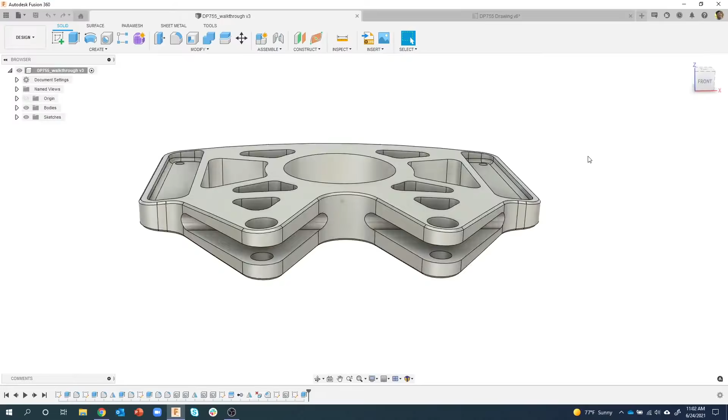I posted this out onto the Facebook forums, and people have already responded how they would go about modeling it. My method is not the correct method. It's not the only way of doing it, just one way of modeling this. So it'd be really interesting to see how everybody else approaches something like this.

We're also thinking about having Angelo take this model and show how you would machine it—how you'd do these pockets, the curved surfaces, the chamfered edges, and all that kind of stuff. So keep an eye out for an upcoming live stream on that.

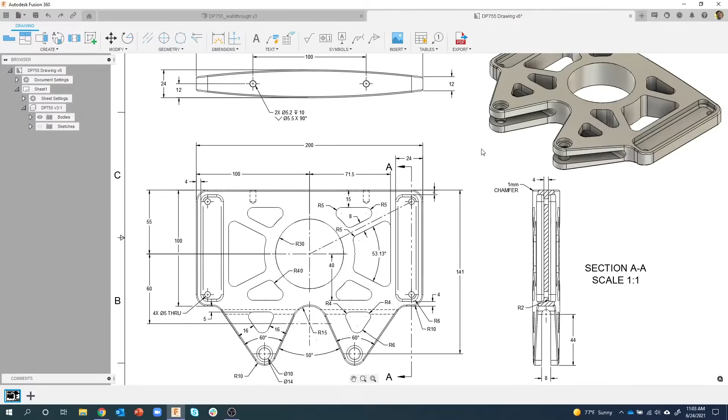This is the drawing that I created that I'm going to go off of, so I'll be referencing this drawing quite a bit. I've also included the outline and the drawing in the description of this YouTube video, so please feel free to download those and follow along, or try it yourself once this video is over.

So I'm going to go ahead and dive right in. Again, this is kind of how I approached it—I'm not saying this is the exact correct way. First thing I'm going to do is change my units into millimeters since we're doing metric for this. Because the part is pretty symmetric, I'm only going to draw part of the part—basically a quarter of it, and half of the part. You'll see that as we go along.

I'm going to create my sketch on my top plane because most of the information to me is kind of being displayed in this top representation.

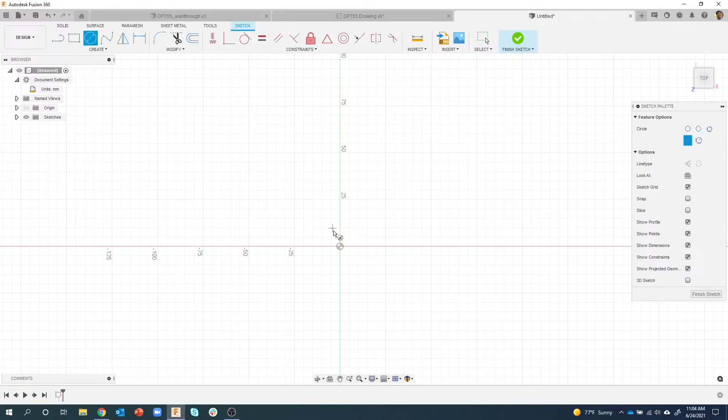The very first thing in the drawing asks for a 30 millimeter radius dimension, and you'll notice by default we do diameter dimensions. So how do I get a radius dimension? All I have to do is click to create the circle—I didn't type in anything. Then I'm going to do a dimension, using the D key as my shortcut. I'll select this, and you'll notice it's showing me a diameter. But if I right mouse click, I can change it from a diameter to a radius. Now it's asking for a radius number—we'll type in 30 and hit OK. I now have a 30 millimeter radius circle.

The next thing I want to do is create a centered rectangle, but it's actually not centered to the origin. It's kind of hard to see, but this rectangle is 100 millimeters tall, and it's offset by 55 millimeters, so it's sitting a little bit higher—there's more room up here than down here. So how do I go about doing that?

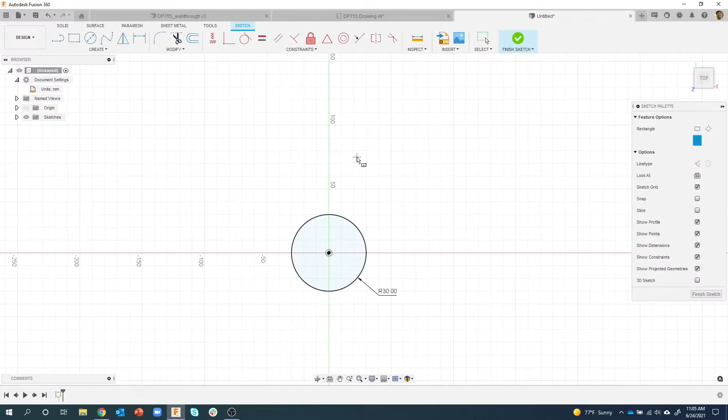I'll go into my rectangle, center rectangle, and just kind of draw it out here in space somewhere, not getting near the origin. I can type in 200 millimeters wide by 100 millimeters tall. Then I can move this around—you'll notice it's not fully constrained. What I want to do now is line it up with this origin right here.

I'm going to do a horizontal vertical constraint, a tip I showed last time. You'll notice it's not catching to the midpoint here—it's looking for a point, and there is no point along here. But I want to catch to the midpoint, so I'll hold down my Shift key, and now it's catching to that midpoint of this line. I'll click there, and it's now made the midpoint of this line vertical with my origin.

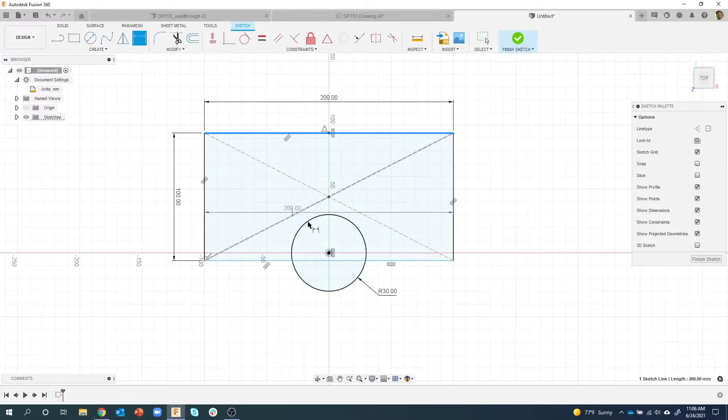Okay, now I can throw that dimension on here. So I'll say from there to there, we'll make that the 55. And sure enough, you can see it put it in the correct location. The lines turn from blue to black. That means they're fully constrained, and we're going to be focusing on that quite a bit to make sure that we have a fully constrained sketch as we're going through.

Okay, what I'm going to start doing now is start to build these arms. And these are kind of interesting. You'll notice they're like 60 degrees like this, but this one is more sloped than this one over here. This is 50 degrees here, with a radius of 15.

So I'm going to start building these arms right here. Let's start out with that 15 millimeter radius. So again, I'm just going to start to draw off to the side, and it's asking for a radius, so I'll click somewhere, create my radius dimension, and type in 15. Then I'll make sure that's lined up using constraints, like so.

Okay, now I'm going to back up half a second here. You might ask, well, couldn't you just hover over this point right here and you'll see this cyan line appear? Now I know I'm perfectly lined up with that center point and I could create my circle. Well, here's the deal—that was just a snap guide, so it is not constrained at all to that point. That's only a guide. That's why I tend to draw things off to the side.

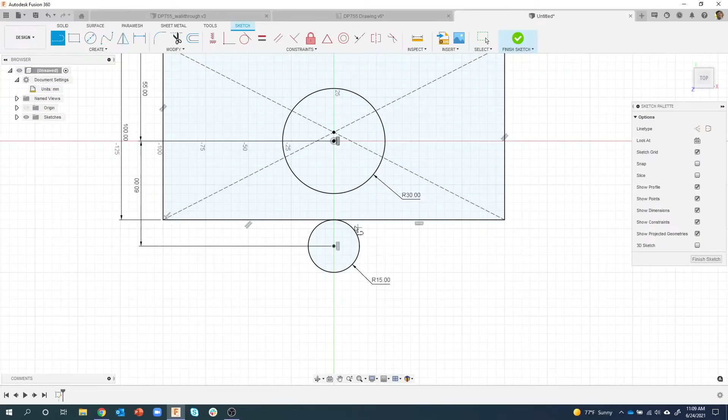So I obviously want to do a tangent line because it's going to come off this circle in this direction. So I'm just going to click and hold, and you'll notice by holding down my left mouse button, it's doing this automatic tangent for me. So I'll click there, maybe something like that, and then do the same thing on this side—click and hold, you can see I got the tangent, and I'll just come over here somewhere. So I quickly mocked up what that's going to look like.

Then we're going to control it with the dimensions from the drawing. Again, I'm not going to flip back and forth too many times on the drawing, but just know that I'm referencing the drawing to get these measurements.

So let's do a dimension. I'm going to go ahead and control these—we know those need to be 60, so I'll type in 60. I'll do the same thing over here. Now I could type in 60, or I can click on an existing dimension and it's going to reference that dimension. The reason this is handy is because if I came back and said make that 65, that's going to turn to be 65 also, and I don't have to type it in twice or make a mistake, typing in 61 instead of 60 or something like that.

Okay, so now we know those triangles are 60 degrees. Then I'm going to control—we know it's 50 degrees between these two guys—so I'll place that one and say 50. But you'll notice this one's leaning a little bit more than this one over here, and this one's a little bit higher than this one over here. But this is kind of the fun part, I think, where you see your sketch start to get built and controlled correctly.

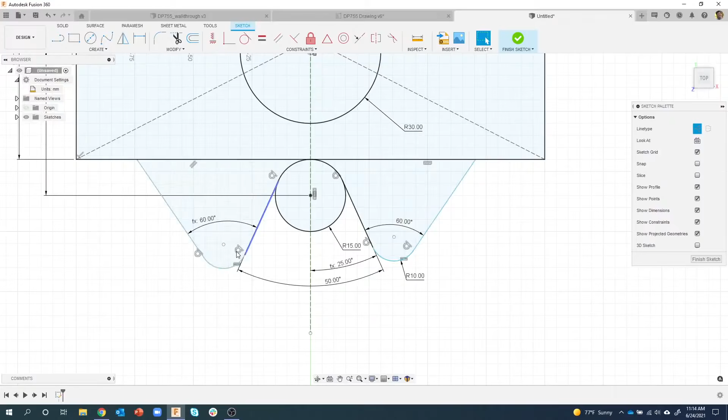Now I want to make these lined up, so let's control one of these. Using the drawing here, I can see that this circle, or this center point, happens to be 141 from the top edge. So I'll throw a dimension from here to that point, and say 141, and we're starting to see all of this is becoming fully constrained.

Now I want this other finger to be perfectly lined up with that, so let's go ahead and do a horizontal constraint. I want that point to be the same as this point right here. So you can see by using the horizontal constraint, it went ahead and did that.

I notice there's a lot of road noise around me. Hopefully that's not coming through on the microphone. Hopefully you guys are able to hear me okay and learn everything.

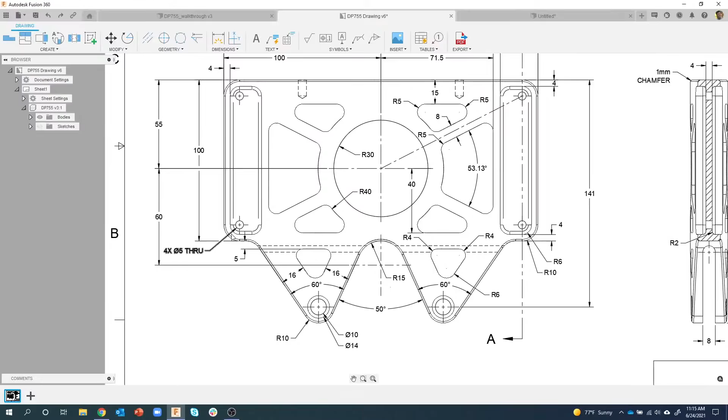Looking at my drawing, there's a lot of stuff going on, and you hear me all the time talk about keeping your sketches simple. I highly recommend doing that because the more complex your sketch gets, the more confusing it gets. So I'm actually going to reuse this sketch a couple times, but then we'll get to a good stopping point, create a new sketch, and then finally create a third sketch, for example.

So I'm going to keep this sketch pretty simple. I'm not going to do any of these pockets or holes or anything like that. All I'm concerned about right now is the main shape. We can see that the overall thickness of this object is 24.

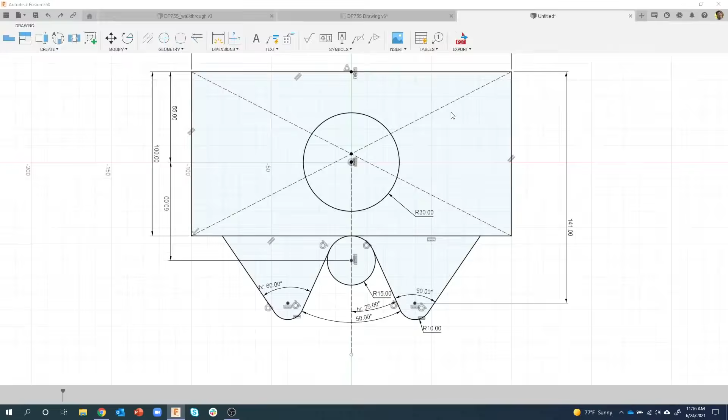We can also see that it's pretty symmetric, so I'm actually going to do half of the model. We're only going to create the top half of this model, and then we'll mirror it near the end to move everything to the bottom side. So I'm going to go half of 24, so 12. We'll finish my sketch, select my profiles that I want, extrude, and go ahead and say 12 instead of the 24.

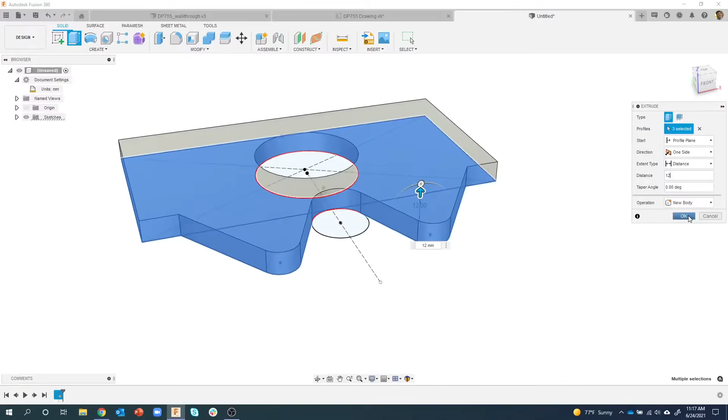Also notice I'm extruding up, so my sketch is kind of on this bottom plane. And there's our basic shape.

Now I'm going to continue on here. Let's fillet these edges. Again, using information from the drawing, I'm just going to fillet these vertical edges. Might rotate so I can see that one a little bit better.

10 millimeters, we're good to go there. And now I want to start working on some of these pockets and stuff like that. Here's my original sketch, I'm going to kind of keep that as my original, almost like my skeleton sketch. And then my next sketch I'm going to do just, for example, the pockets.

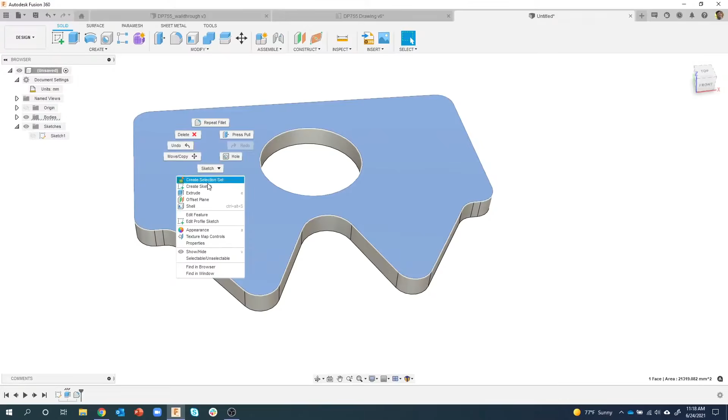So I'm going to click on this top face, create a sketch, and then I want to grab the information, so we're going to project. So create, project, or as you see me always do, I always use the P key, P for project. But I want to project the whole body.

In fact, it wouldn't matter in this case because there's not much going on. I could do the specified entities, but I'm going to do bodies pretty much the whole time. So I'm going to switch to bodies right now, and it's going to project that whole body onto our sketch, including, for example, the center points of these fillets.

And now you kind of know why I did the fillet before I did this sketch. If I had kept these square, I wouldn't have something to reference right there, for example.

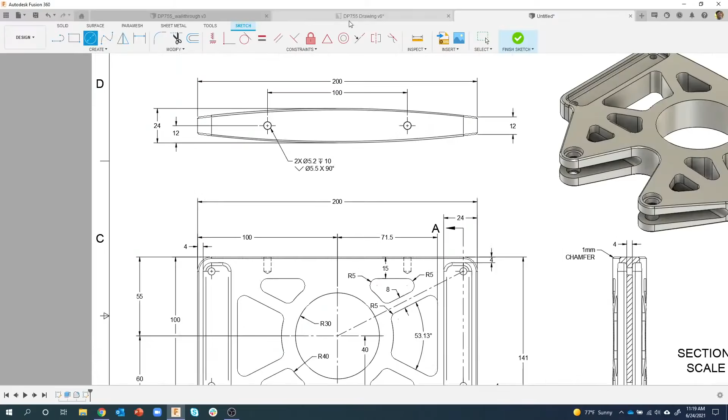Okay, so let's do some, again, referencing this drawing here. I'm going to create this radius 40 circle that goes all the way around like so, and we're going to start creating these pockets.

Again, going to keep it simple, so we're not going to do these rounded edges until later, but I can see they're 15. Here's a construction line that goes to the corner there, so I'm probably going to do that, and then an 8 millimeter gap there. Okay, so let's kind of build that.

So circle, construction circle, because I'm just going to kind of reference this circle. Again, it's a radius, so I'm just going to go ahead and click, dimension this guy, and say radius of 40. And it'll update, and then I'll do my line.

I'm still in my construction, so I can go ahead and draw a line to that point there. And I'm going to go ahead and do a vertical line because I'm probably going to end up mirroring some of these pockets. So once I create this, I'm probably going to mirror it over there. In fact, let's go ahead and do another construction line like so.

Let's offset this angled line right here. So remember it was a spacing of 8, so I'm going to type in 4, and it's going to offset 4.

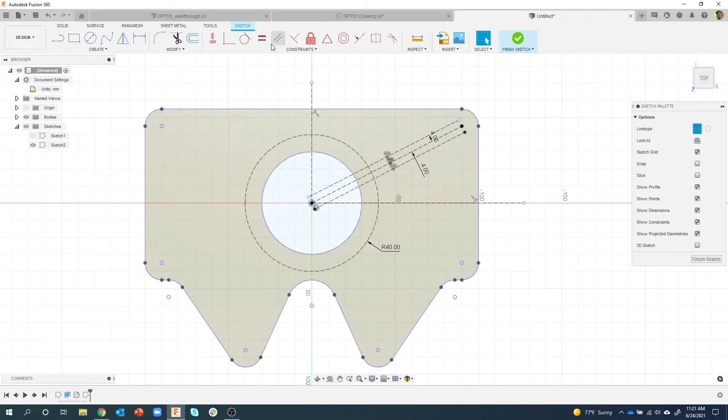Then I'll go ahead and do the offset again, minus 15, enter, must not have hit enter. I'll do the offset here. This is 71.5, again, according to the drawing, right here, 71.5 to kind of define the edge of this pocket.

So we just created some construction lines that'll help us out. We have this curved surface here, we have this 15, and now you can kind of see we're getting a particular shape here.

So I'm going to trace over this. I'm going to click on the line command and make sure my construction is now turned off. So I'll go from here to here, and from there to here. However, I can't use the line command to do this.

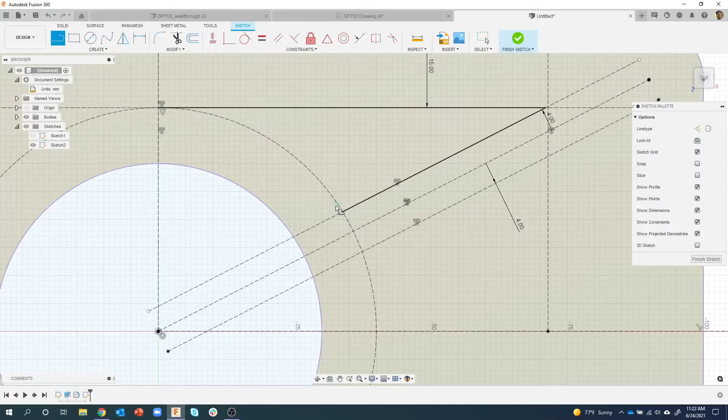So I'm going to show you a neat little trick here in just a second. I'm going to continue doing that exact same thing, tracing from there to there and from there to there. Okay, so what about this little segment?

Because I don't have a valid profile. Well, notice this is one solid circle, it goes all the way around. Under the modify command, there is a command in here called break. Watch what happens when I hover over this segment. It's kind of hard to see, but there's little red X's appearing right here in the corner and up there. So by clicking on this segment, I just broke that segment out of the full size circle.

So let me do that again. I'll come in here and say break. I'm going to click on this segment. It goes to the next boundary, so that's why you see that X there and the X down there. So I'm going to go ahead and break that. Then I can come in and see that that's its own little segment.

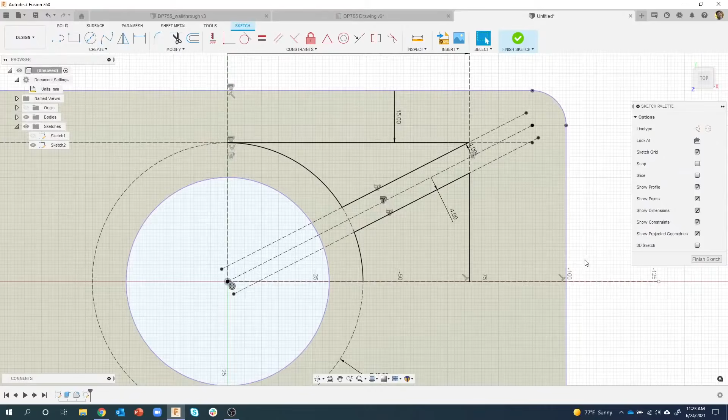I don't want it to be construction, I want it to be an object line. Same thing with this guy. I can click on it and say, change it from a construction to an object line. And we now have a valid profile right there.

We don't have one here because it's not closed. But I'm going to show you a cool trick here. We're going to mirror this, because this is basically the same down here. So let's just use the mirror command. I'm just going to draw a box around what I want to mirror. What's my mirror line? This line right here. I'll say OK, and we can now see that we have a valid profile there, there, and there.

So I kept my sketch pretty simple, and you can kind of see I started with this and then I mirrored this, but look at all of these icons here. Could I have done this a little bit differently? And the answer is yes.

I'm going to undo, and instead of doing a mirror, I'm just going to break it. Let's go ahead and break this segment right there. Let's go ahead and convert that to that, and now I'm done. I am not going to mirror or anything like that on my sketch, and notice how much cleaner this looks.

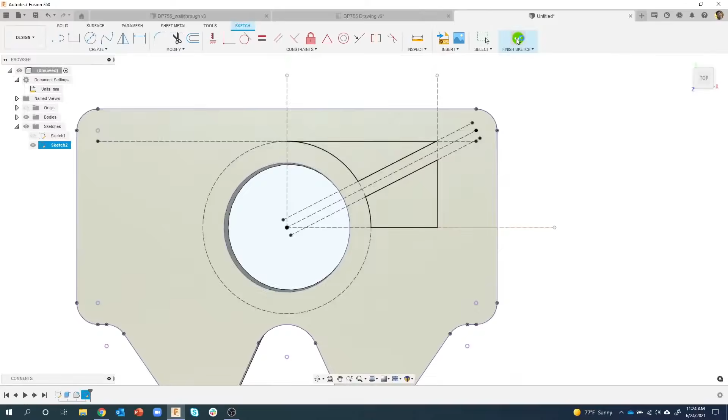I'll go ahead and extrude these guys. I'm going to start to push down so you can kind of see what's going to happen. Instead of typing a distance, I'm going to say go through all. That way I don't have to remember, was it 12, was it 24, was it 13? I don't care, I just want it to go all the way through the object, like so.

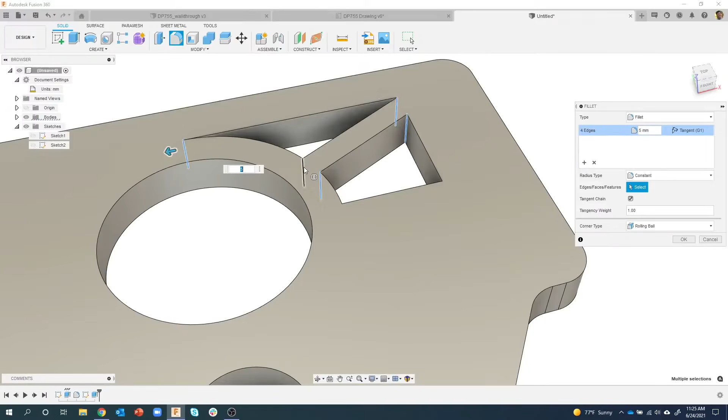Okay, then I'm going to come in and fillet these guys. So I'll say fillet, these are 5 millimeters. I'm going to fillet just those two edges there. And then watch what happens when I add in these other edges. They start to create that curved pocket there.

So I didn't create the fillets in my sketch, I kept them sharp. And then I used the fillet command to do it in 3D. Now, why would I do that? Well, if I want to come back and change the size of these from 5 to 2, it's very fast and easy to do that. I don't have to edit the sketch, it's just right here as a feature.

Okay, now instead of mirroring the sketch, could I mirror these pockets? So let's go ahead and create mirror. I do not want to mirror faces because then I'd have to come in and select every single face, that would take a long time. I don't want to mirror the body because this is all one body, so I want to mirror features. And it's asking, which features do you want to mirror? Well, I want to mirror the extrude, and I want to mirror the fillets. So I'm going to mirror both of those features.

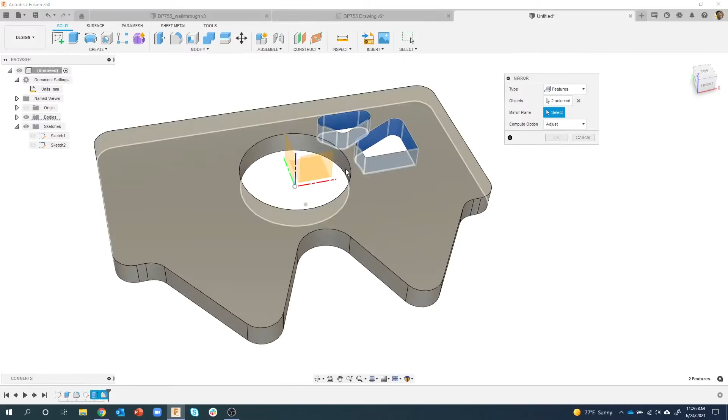What's my mirror plane? We'll say that guy. I'll say OK, and I now have those pockets there. So basically I created a quarter of it, and then we mirrored it that way.

Now I think you guys are probably cluing in what we're going to do next. We're going to now mirror this to the other side. So create mirror features. Okay, well, what features do I need to select? Well, if I only selected this mirror feature, notice my preview. So this mirror feature is referencing that extrude and fillet.

So I need to actually come in here and say, I want to do all three of these. I want to do the extrude, the fillet, and the mirror. We'll mirror that direction, we get a nice preview of what that's going to look like. I'll say OK, and we now have those pockets on both sides.

Now, if I go back to my drawing, some of you eagle-eyed people might be like, well, you forgot a pocket, or actually two pockets right here.

Now, I did this on purpose because this is exactly how I modeled the part. I went along and then looked at my drawing and realized I totally forgot to do those other little pockets down near the fingers. What do I do? I'm trying to recreate what would happen in the real world with all of you designers, hobbyists, and engineers. You're going to run into situations like this, where you forgot to do something or should have done it 20 steps ago. So let's take a look at what we're going to do to resolve this.

So here is my sketch in my timeline, this right here. I'm going to go ahead and edit that sketch, but now you'll notice we don't see a lot of the 3D stuff going on because that happened after we created this sketch. That's okay, I want to start creating these pockets.

Again, I'm going to use information from the drawing, so I'll offset this line minus 16, and do the same thing for this line, minus 16. Then I'll just draw a line that touches this line here, goes horizontal and touches that line there. Now why do I care where it's touching? You can see it's actually creating coincident constraints, so no matter what I do with this line, it's always going to be touching the edge of those two lines. Kind of cool.

So we have a coincident constraint, a horizontal constraint, but you'll notice the line is blue - it doesn't know where this line needs to be. According to the drawing, it's 5 millimeters down from this edge. So you can see that right here, 5 millimeters down from that edge. And it turned black.

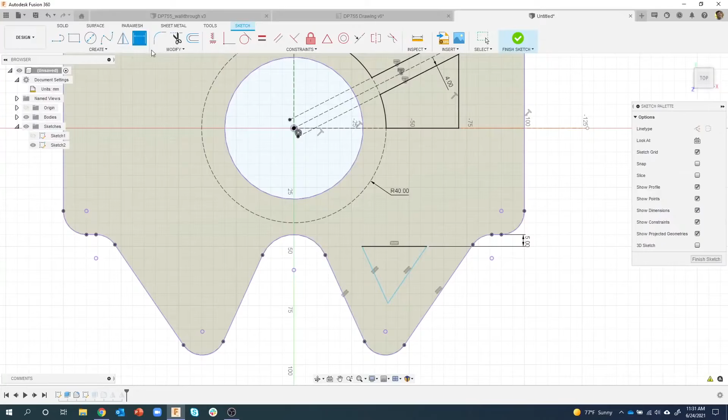Well, I could just throw a dimension back on here. You'll notice it remembers it was 16. I could do the same thing here, I could even reference that guy if I wanted to. And now, again, it's fully constrained. So you have a couple options: don't trim it, or trim it and maybe you might have to rebuild a constraint or a dimension.

Okay, so let's go ahead and finish our sketch here. Now you'll notice it kind of went away, so I'm going to turn that sketch back on so you can see it there. Now here's the deal - this also has to be over here.

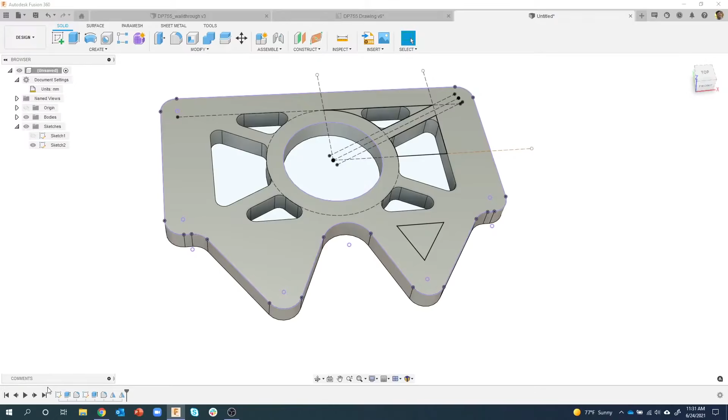So what I'm going to do is actually back up one step in my timeline, so I'm before I did the mirror to the other side. Kind of went back in time a little bit. I'll go ahead and do this extrude. How far? We'll say all, so it goes all the way through. That looks good. I'm going to turn off the sketch so it's a little bit easier to see.

Let's fillet these edges. So I'm basically working on this part of the design back in time before we did the mirror, hopefully you see what's gonna happen here. I'm going to do a radius of 4 for that edge, a radius of 4 for that edge, but a radius of 6 for this edge right here.

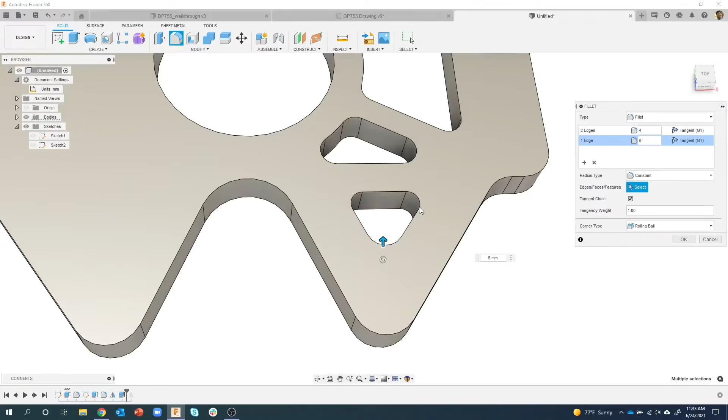Well, they're all kind of related, so I'm going to add a selection set. I'll click on this little plus, and click on that vertical line and make it 6. Now you can see we're going to have one fillet feature in the timeline, but it's going to do two different sized fillets. In fact, if I say OK, there's my fillet feature. I really like these selection sets because we're working on the same area right here. So instead of having 3 or 4 different fillet features, I could have one with as many selections and sizes as I want.

Okay, so I've now created that little pocket, and let's take a look at the drawing. And I'm like, you know what, there's a rectangular pocket in here also that's on the other side. Man, I should have totally done this before I mirrored those pockets, these through pockets.

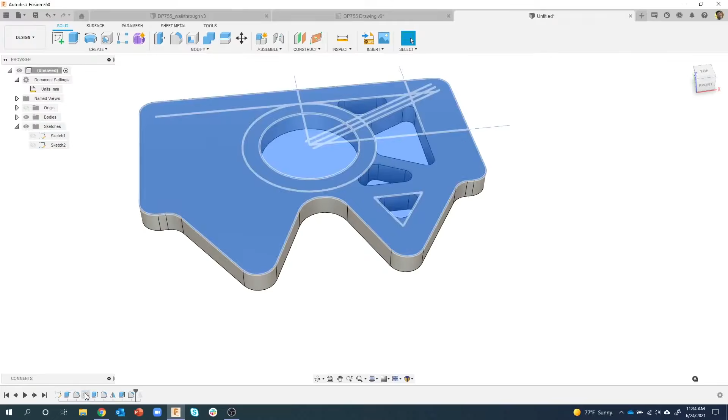Well, that's okay, let's come in here and create the pocket. In this case, I'm going to create a new sketch just to simplify things. I could go back and edit this sketch here, but I've got a lot of stuff going on over here, I don't really see the 3D representation of it. This is what I was talking about earlier, where sometimes I'll have maybe 2 or 3 sketches. Now you saw that we went back and edited this sketch, we added some extra stuff to it. But here I'm just going to create another sketch, and now I have a nice clean representation. I'll go ahead and project the body, because I want to grab information from the body.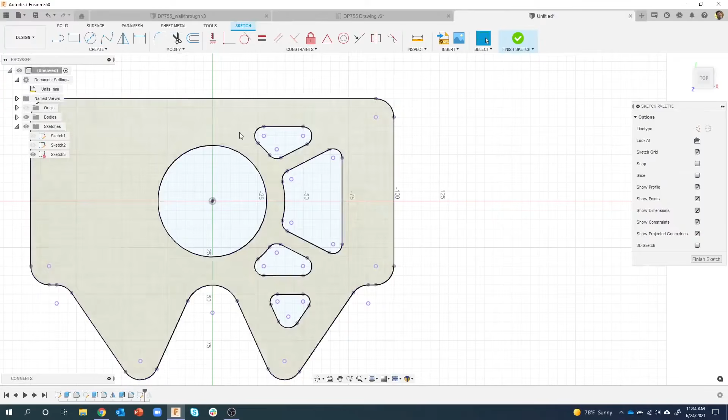I'm just going to draw or mock up a quick little rectangle, like that. I don't care about the size or anything yet. We're going to come in and dimension these. According to the drawing, it's 4 millimeters from the top, 24 millimeters from the edge, 4 millimeters, etc. So now I do care about the size. Let's go ahead and do that.

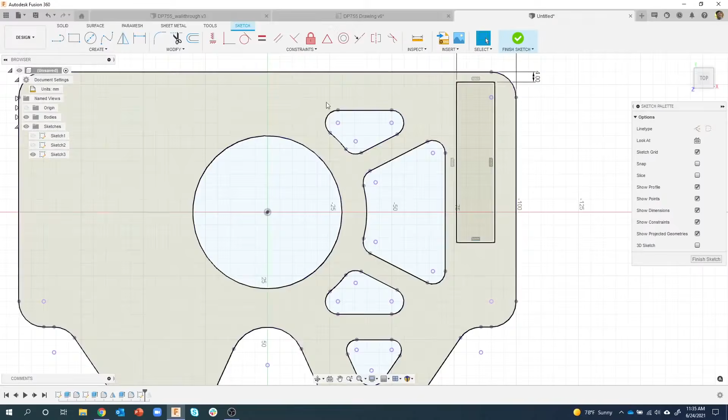I'll say we know that this is going to be 24, and this is going to be 4 here. You can see how as we start to do this, it's starting to constrain the sketch for us. Let me make sure I'm in my dimension, from there to there. I want that to be a vertical dimension, 4. And then the last dimension here is 4 right here. So basically it's 4 all the way around. I'll throw a dimension from this edge to this edge.

I should have, and could have, clicked on an existing dimension to reference that. Let's go ahead and do that down here. I'll throw a dimension from here to here, and let's just reference that one. That way, if we decide to change the size of this and make it 6, everything's going to update around. Little tip there: instead of having to type in 6, 6, and 6 to change that, I only have to change one of them.

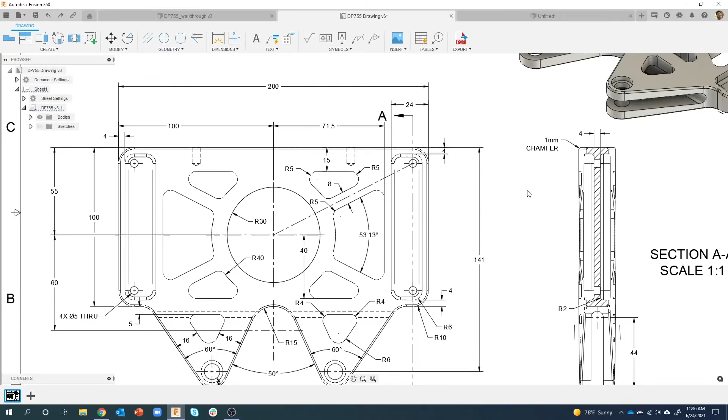Finish. Now this is a little bit confusing, hopefully I can explain this. This is a section view that's cutting through the model, and we can see that there's basically a web. It's this face you see right here, and it is 4 millimeters thick. So while the rest of this model is pretty thick, right here it's only 4 millimeters thick.

Now I drew my sketch on the top face, and you'll notice I don't have a dimension that tells you from this outside edge to here what that is. We have no idea what it is, and the drawing doesn't tell us. So how would we solve this? I like to throw these little curveballs in here. Let me check the questions really quick before I dive into here.

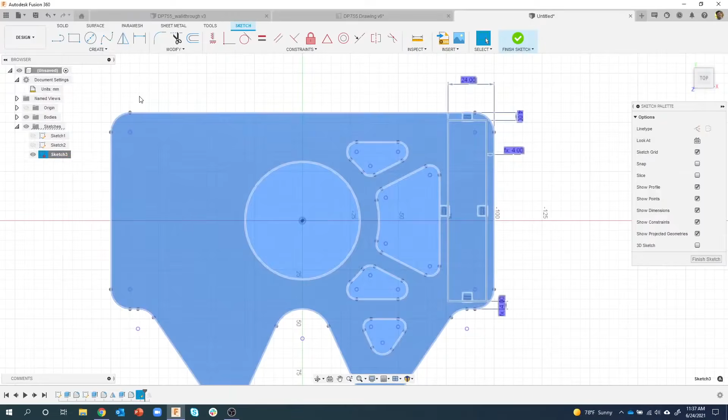Al asked, is there a way to print a sketch? There is. If you come into here, you can right mouse click, and you can see you could save this as a DXF, then bring that up into a PDF drawing or whatever. There's lots of viewers out there for DXF. Or if I just come in here and say File, Share... nope, I guess there is not, I thought there was. There's 3D print, but usually under share, like I can do capture image. So for example, let's just do this: File, capture image. It'll let you capture this image, and then you could print that. So yeah, that's a good question.

Okay, let me turn my body back on. Okay.

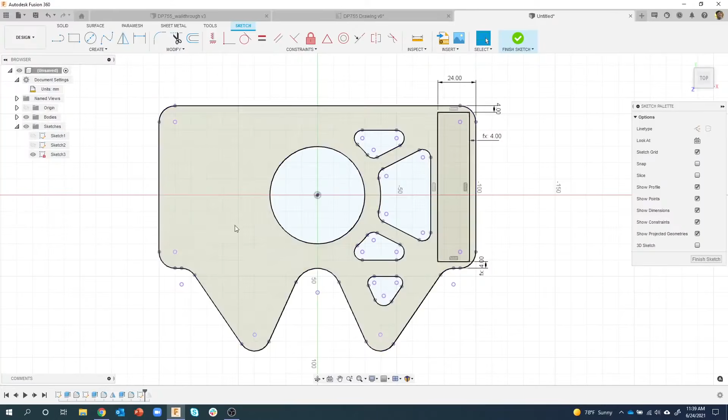Another question from Al: are some constraints more expensive to compute, like would using horizontal take more performance than using symmetry? This is a really good question, thank you for asking that, Al. I don't know if one is heavier than the other, but I personally do not use symmetry that much. One, because it really complicates and clutters my sketch. Yes, I know you can turn off what's being displayed and all that, but I like to keep my sketches simple, and I would use a 3D mirror versus using symmetry in my sketch. So I don't know how to really answer that question. If I reference this 4 with a bunch of different dimensions, I don't think that's any heavier than just saying this is 4, this is 4, this is 4, etc. I just think this is faster and smoother to make changes down the road. So yeah, that's a good question, I do not know the answer to that. I do know the more complex your sketch gets, the longer it takes to calculate, and that's one of the reasons I like to keep my sketches as simple as possible.

Okay, so let's do this. We're going to extrude this guy.

Now what we're going to do is change the start so it's not this profile. Basically what it's saying right now is when we do an extrude, it's going to start at that profile plane where we drew this profile.

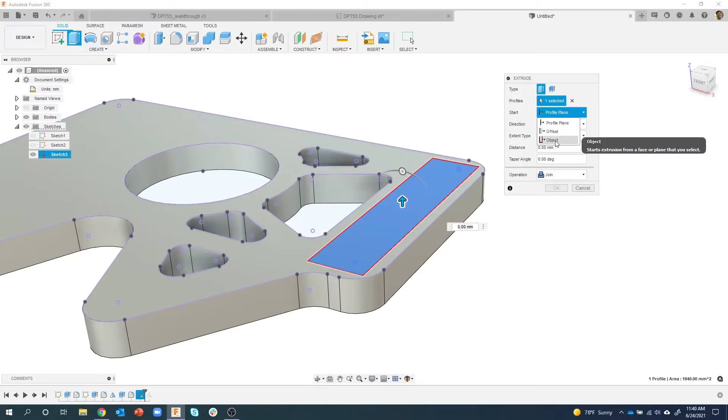I can come in here and say offset, or I can say from an object. I'm going to say from an object, and let's click this bottom face. Now watch what happens when I start to drag. It's using this profile, but starting from the bottom of the part, extruding up. I don't want it to start from the bottom. We know there's a 4 millimeter thickness there, but now notice I have this offset.

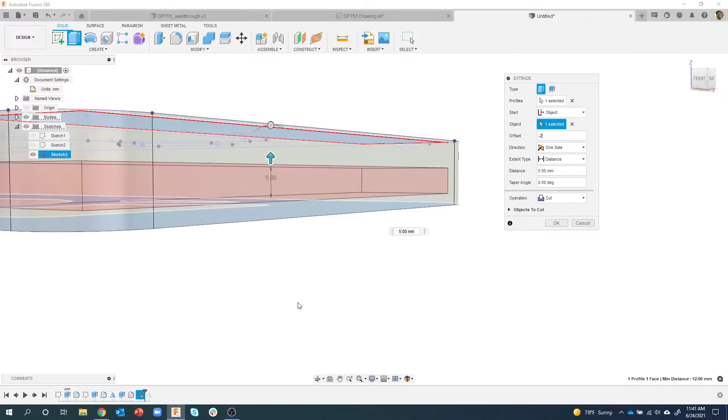So I'm going to type in -2, and we can visually see what's happening now. It's starting here, and you're probably asking why the -2. This is the positive direction, so I told it to go in the negative direction, 2 millimeters.

Now how far do we need it to cut? We want it to go all the way through. So it's using the profile from the top face, starting at the bottom face, offsetting 2 millimeters, and then extruding all the way through the object. Kind of different, but really powerful. I didn't have to move my sketch to the other face or create another sketch or undo or anything like that. I just used this start option.

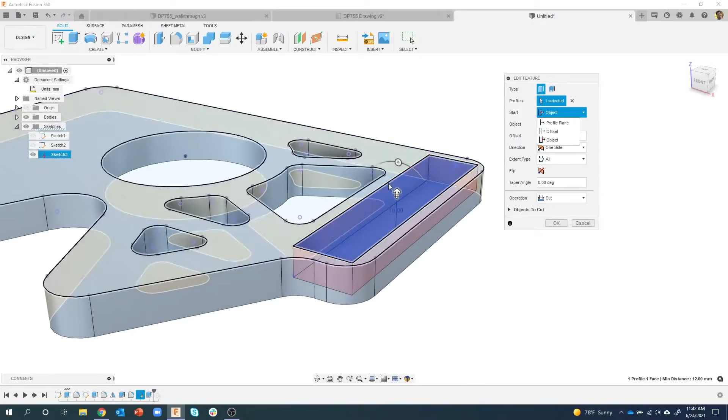And you might ask, what's offset? Remember my profiles here? I could have said offset, 3 millimeters down, and then start to extrude. So that's what that is. Object allowed me to pick a totally different object or a different face. Cool little tip there, hopefully you guys learned something.

Let's go ahead and fillet this pocket. I think these are radius 6 according to the drawing. So there's that guy.

Now, if I were to come in and add a selection set, I could, but notice these fillets go away, so I have to manually select all 4 of these edges, and I even have to rotate potentially. But then I could come in and say, okay, that is a radius of 2, and it'll do all of them in one fillet feature.

Or I could come in here and say this is a radius of 6, let's just do those 4 edges. I'll say okay, there's my fillet feature. Then I can come in and fillet, and because of this tangent chain, it's going to select all of those edges for me. I can say 2, and I get the exact same result, except now I have 2 fillet features.

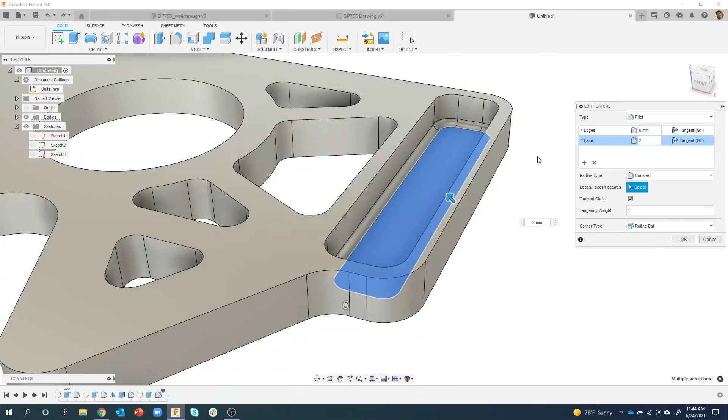So let me back up. With a selection set, I was manually clicking all 4 of these edges. But instead, I can just click on that face, tell it I want that to be a 2 millimeter, and it's going to select all those edges.

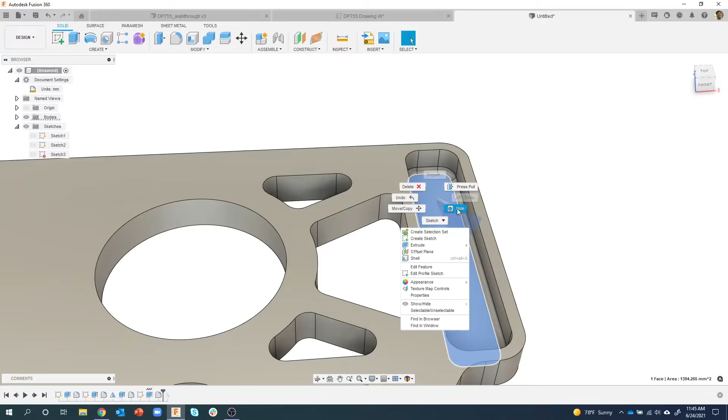I'm going to go ahead and do those. It looks like they are 5 diameter through holes. So I'm going to click on this face and use the hole command. I really like the hole command instead of using a sketch and a profile or whatever, it gives me a nice preview.

Obviously way too big, so the first thing I'm going to do is change my diameter to 5. Okay, that's looking a little bit better. Now where does it need to go?

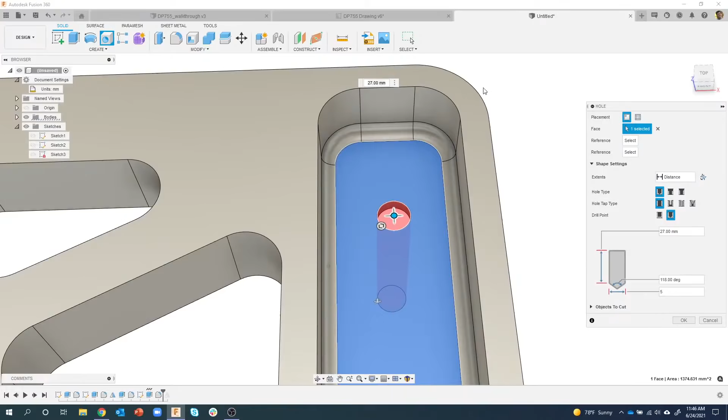You'll notice there are no dimensions to these circles. However, there are center lines, so we know they're centered or concentric with the arcs or the other fillets. I'm going to start to drag this little blue dot, and you can see 2 white dots appeared - that's the center of all these edges, these fillets. I'll just get near that dot, boom, and it drops right onto it.

It's perfectly where it needs to be. I don't need it to be that long, so I'm just going to say go through all. It figures out what it needs to do. Diameter 5 looks good. I'll say OK.

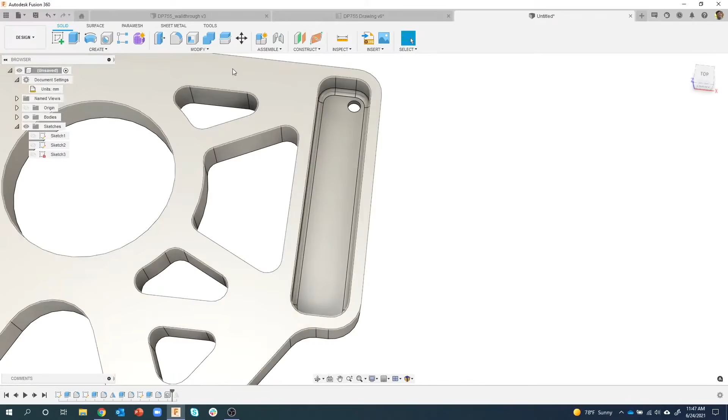I'll repeat my last command, hopefully. Maybe not. Oh yeah, because I pre-selected, so I'll just do the hole command. I'll click there, it remembers my 5. I'm just going to start to drag, drop it right there, it snaps right to it. And we'll say go through all. And there we go, those 2 holes are exactly where they need to be.

And I didn't have to create a sketch or anything. There are features in the timeline, so I can go back and edit those very easily.

Okay, now I pretty much have everything I need, except for these holes here. We're going to come back to those later, but I have this pocket. Okay, so let's advance forward in time.

Just these pockets mirrored over. Nothing else did. Well, why not? Well, because when we created this mirror, we only told it to select certain things out of our timeline. So I'm going to edit this mirror feature. You can see right here, features, 3 selected. We only mirrored the extrude, the fillet, and the mirror.

Well, I can come in and say, now I want to grab this extrude here, that fillet there, so now it's going to mirror that pocket. You can see the preview. But I also want to do maybe that pocket, the fillet, and the 2 holes. Notice the preview.

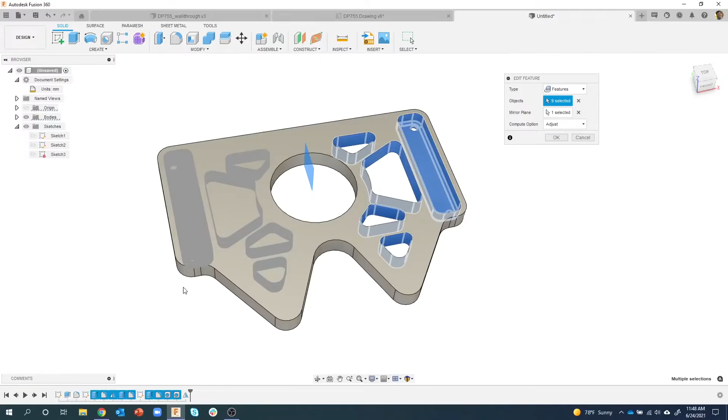I'll go ahead and say OK, and just like that, we didn't have to create multiple mirror features. We were able to go back in time and put all of these where we wanted them, and then add them to the existing mirror feature. I think that's pretty cool that you can do that.

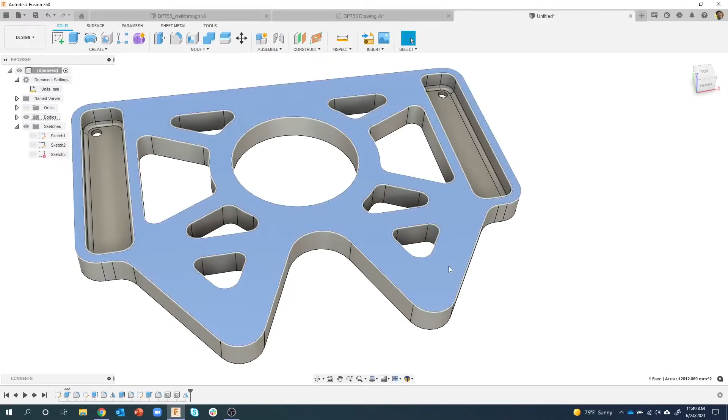So I'm going to use the hole command. And just like before, if I drag on this face, we can see there is a point at the center of this curve. So I'm just going to snap right there. We will build this the right way.

So I'm going to say counterbore. I like to do the larger diameter first. Now I'm probably going to get an error. Yeah, well, maybe not, okay, it's smart enough. The counterbore diameter is going to be 14, and then the counterbore depth is going to be 6.

Okay, now I want it to go all the way through. So there is a depth there, so I want to basically go all the way through, and you can see we get that result there. Say OK, and there's our counterbored hole.

And I'll do the exact same thing over here. It's going to remember all of my last settings, so all I have to do is drag it into place.

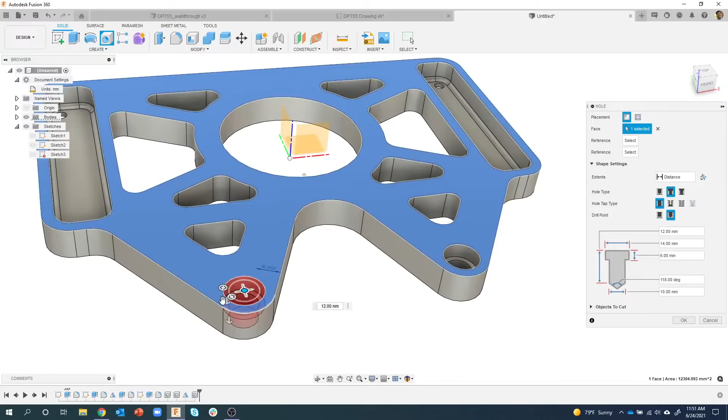Now I could have done this before the mirror feature, etc. I could have, but I didn't want to beat a dead horse doing things over and over again. So it's totally, again, up to you. If you wanted to do that before the mirror and then mirror that whole feature, it would have appeared there. I feel more comfortable knowing that that's going exactly at the center of that curve.

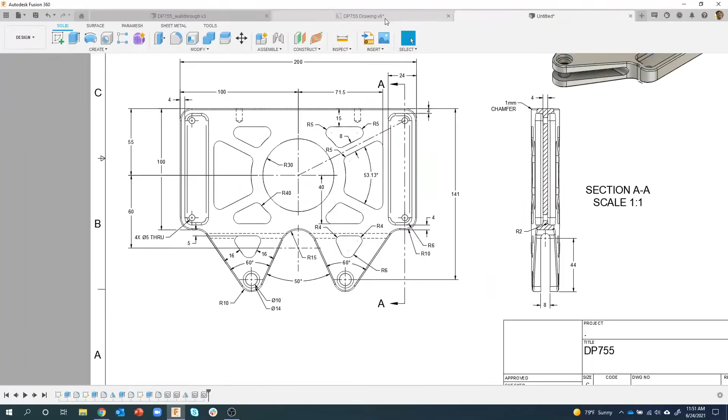Okay, so pretty quickly we've created this whole part. Now all that's left is to create this curved surface. And you'll notice I just did a flat extrude. I didn't do anything to make this a curved surface.

I'm going to basically create a curve according to these dimensions here and use that to split the body, and that's how I came about doing this. So I'm going to go ahead and create a new sketch, and let's just do it on this front plane. We'll project the whole body. We'll say OK - you can see it projected that whole body.

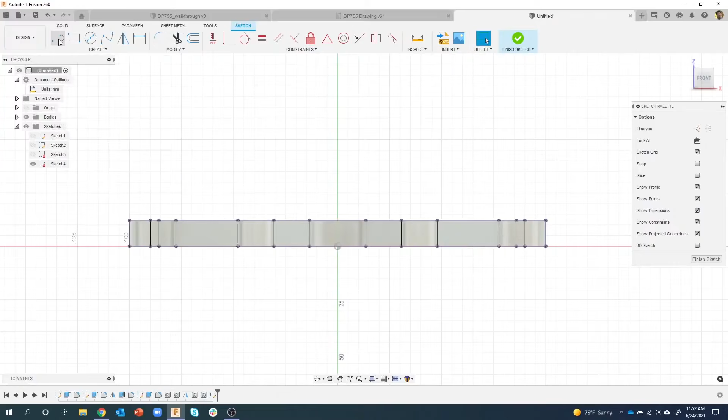And then I want to create a line, a construction line. I'm just going to click somewhere like up here, for example, and maybe over here, making sure that that's horizontal.

The reason I'm doing that is because we can see here that the overall thickness of this curve is 12, so I'm going to dimension that to be 6 millimeters up, because we're basically slicing this in half. So half of 12 is 6. Let's go ahead and throw a dimension on here, from here to there, let's just make that 6. I could even have measured this line and said this distance has to be half of what that measurement is.

That way, if we were to ever change the thickness of the part, think about all the functionality you can do here. Okay, so now I'm going to do an arc. Let's do a center point. No, let's do a 3-point arc.

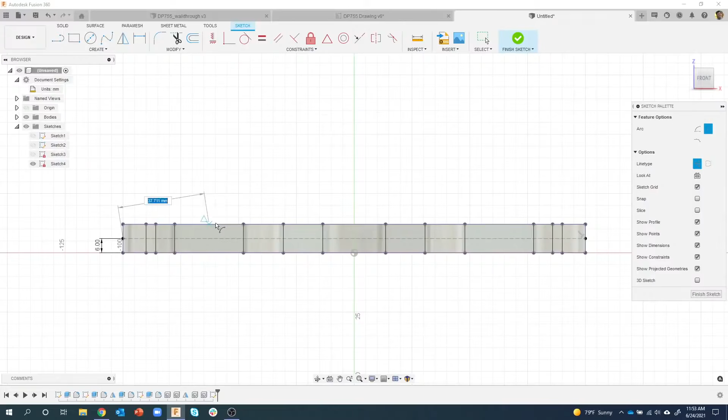So I'm going to start at this point here, catch to there, then catch to this point here. I usually move to kind of see what's going on. I can see, uh-oh, I'm in construction, so let's go ahead and turn that off. And then you can see I can snap right there, so I'm going to go ahead and click.

But this line is still blue. Well, why is that? If I grab on it, I can see that I can still move it. So this is one of those examples where I like to over-exaggerate or under-exaggerate and physically see that my constraint is actually working. Now you can see I drag this curve down a little bit, maybe I'll drag it up a little bit like so.

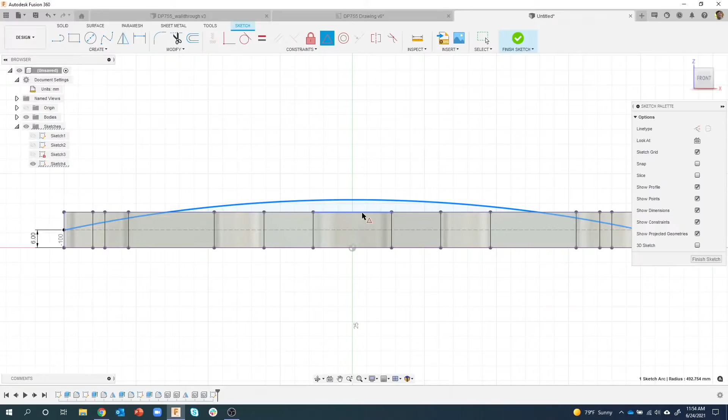Okay, so now I need to constrain this. Let's do the midpoint of this arc is at the midpoint of this line. And now we can see that that arc is no longer blue, it's fully constrained. So again, I always like to test and try to make sure things are working the way I expect. That looks good.

Then we're going to use just this line. I don't have to create a surface or anything like that. I'll come in here and say split the body. What's the body to split? In fact, I'm going to expand this open. That's the body to split.

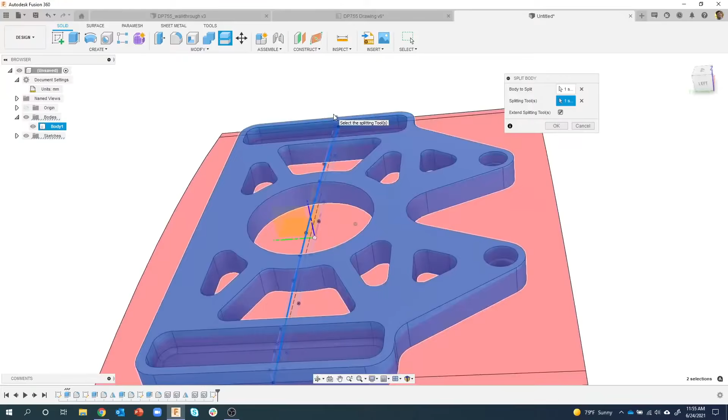What's my splitting tool? I'm just going to make sure I click on that line, that arc. And we can see that it's going to take that arc and basically create a surface and use that to split—that's kind of what's happening in the background. You'll notice I have extend turned on, that just gives us a little bit extra border all the way around instead of just to the edge of the line. I usually have that turned on.

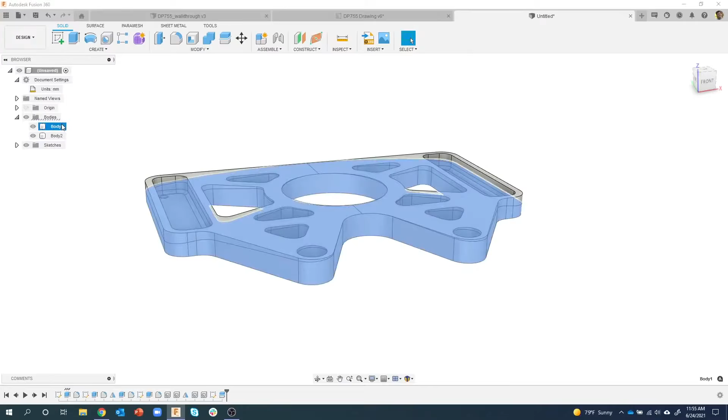Watch what happens to my bodies folder when I say OK—we now have 2 separate bodies. Now we don't need body 2, so we're going to go ahead and just remove that. Not delete, but remove, we don't need it. We're going to remove it from our design, basically. If I were to say delete, there's things that are referencing that, and it could get kind of confusing. So I always use remove, and notice we now have one body.

If we look at it from the front, it's nice and curved, and we could go back and change that curve just by editing that arc if we wanted to. And we've basically created everything. All I need to do now is mirror this whole body.

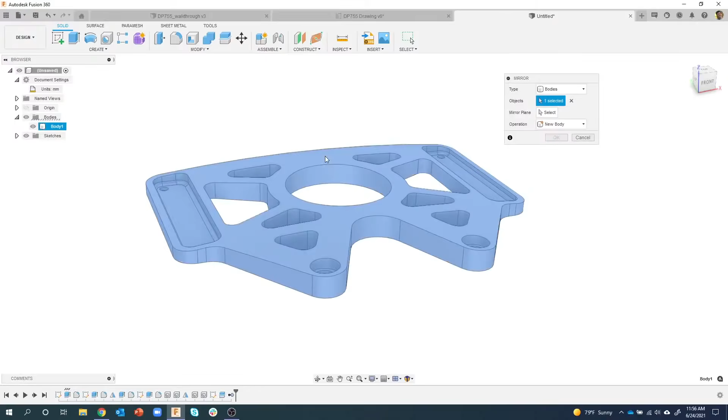So instead of features this time, I am going to say let's mirror the body, that guy. What's my mirror plane? I'll click on that face there. It kind of gives me a little bit of a preview, and I want them to join. And we now have the pockets on both sides.

However, we also have the counterbore on both sides, which I really don't want on this side. So I'm just going to come in and select these four faces and say delete. You can see that it's now a hole—the counterbore still exists on the top, but we basically just deleted that counterbore feature just by selecting those four faces.

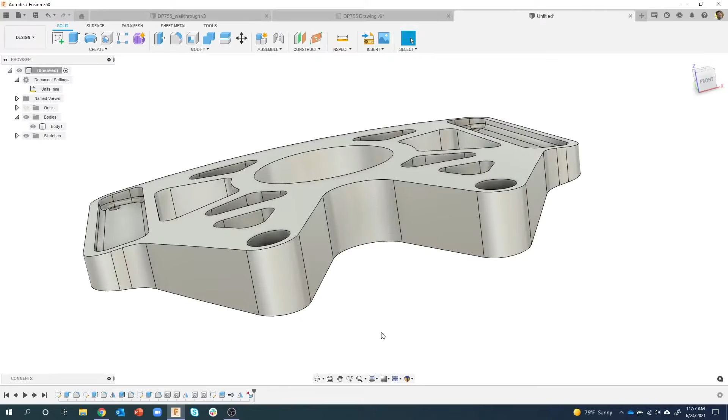There's a chamfer that goes all the way around, so I'm going to click on this one edge and say chamfer. It's a 1 millimeter chamfer, and again, because of tangent chain, it went all the way around my model. In fact, I'm going to go ahead and select both of those edges, and we're going to chamfer both of those edges all the way around. Okay, one last thing here.

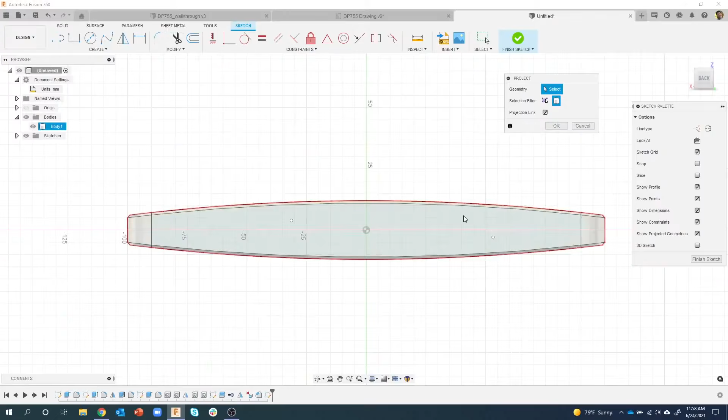Let's go ahead and project the body—we might need to use that. Then I'm going to horizontally constrain these, so I'll say I want those two to be horizontal with each other, and also horizontal with the origin. We know they need to be 100 millimeters apart, so I'll type in 100.

But now how do I get them to center? Just like I showed before, I can throw a dimension here, and it says it's 31. I'll click on that and divide it by 2. And just like that, we now have these points exactly where they need to be.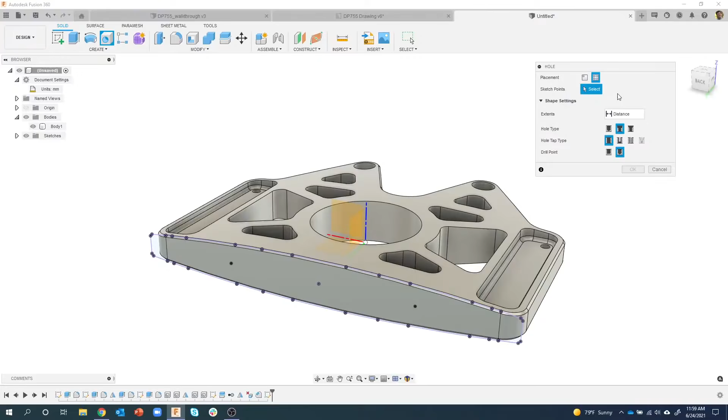I can use the hole command, and here's a neat option: add a point, a single hole, or from sketch. I'm going to click on from sketch, click on one of these points, and it gives me a quick preview of what that's going to look like. Obviously we don't want that, so I'm going to change it to a countersunk hole.

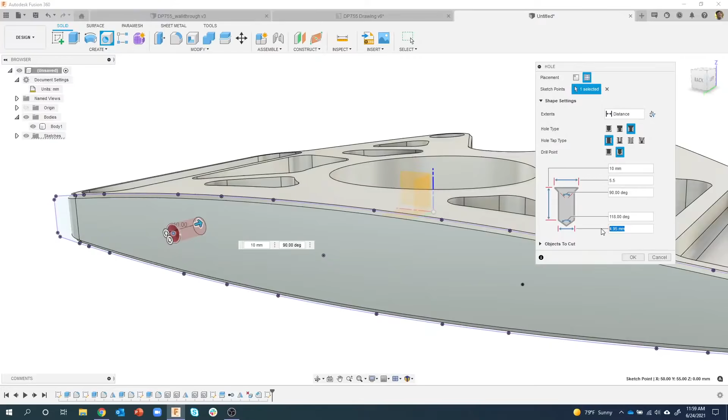We want it to be a simple hole, and the depth is going to be 10. The diameter, the countersink diameter, is going to be 5.5. Again, according to the drawing, I'm just grabbing this, and the hole diameter is going to be 5.2. So it's created that little countersink.

We've got that drill point, got it the right depth, and then I can just come over here and click that point right there. By doing this from sketch, I could just keep clicking as many points as I wanted to. I could even do that center point if I wanted to. We'll say OK.

And I could come in here and say, obviously we want that to be tapped or whatever. So now they're tapped holes.

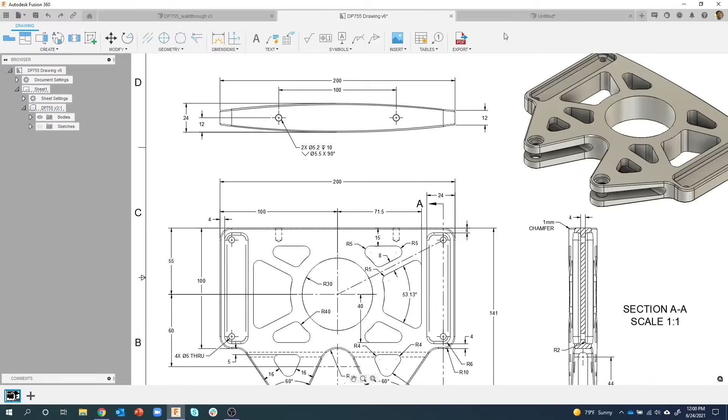The last thing I'm going to do here is this little groove that cuts through these fingers. So I'm probably going to create a new sketch for this, and let's do it on this side plane. I can rotate a little bit. Project—again, I'm going to project the whole body, and you'll see that it basically grabs the whole outside shape of it that I can reference, instead of just a single face if I had selected entities.

I'm going to create a slot, and let's just do a center point slot because I want to control the height of my slot. So I'm going to get near this center point here, move straight up, and go ahead and click somewhere, I don't care where. The diameter is 8.

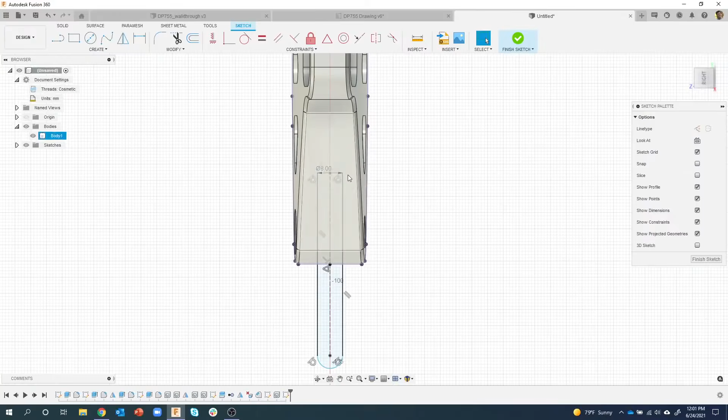I've created this slot, but you'll notice that arc and that arc are blue—that's because it doesn't know how tall that slot is supposed to be. So we'll come in here and throw a dimension from that edge to that point. It needs to be, I think, 44 if I remember correctly from the drawing. You can see that it grew and it's fully constrained. I'll finish my sketch.

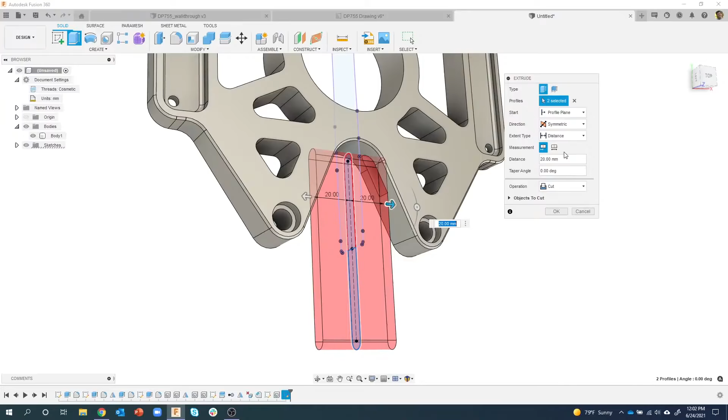Let's do a symmetric extrude. I'm going to say extrude, start to drag—we can kind of visually see what that's going to look like. Let's go symmetric, and we're going to go all the way through, and we can see it slices all the way through. We are done with our design.

So I would go ahead and save that. Not an overly complex timeline—probably about 15 steps, 15 features or whatever. But the fact that it's got the curved shape, we used the mirror command. We basically built a quarter of it, mirrored that, and then we mirrored the whole body to get that other side.